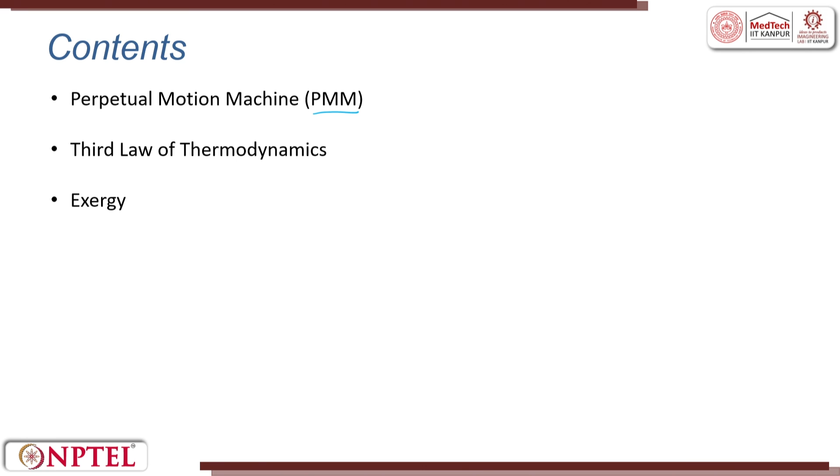What is a PMM? A PMM refers to an imaginary machine, which does not exist, that can operate endlessly without any energy input while continuously producing a useful output. So, you do not give any input, but the machine starts moving on its own. Those machines are called perpetual machines. Such machines have fascinated inventors for centuries, but they are fundamentally impossible because they violate the basic laws of thermodynamics.

So, now it is very clear that the basic law of thermodynamics exists. If the basic law of thermodynamics is defeated, then it is always a perpetual machine. The concept of PMM reinforces the importance of the first and the second law. Energy is converted from one form to the other. The second law says you will never convert all the energy into another form, and reminds us that no energy system can be perfectly efficient or run forever without fuel or energy input.

Think of a scooter you buy, a car you buy: you fill it once and then you forget it. It runs all through your lifetime, no petrol requirement, wonderful, right? But that does not exist. If that could exist, then the laws of thermodynamics fail. So, that is what I have written here: no energy system can be perfectly efficient or run forever without fuel or energy input. PMMs are classified based on thermodynamic laws: PMM 1 and PMM 2, according to the two laws they attempt to break.

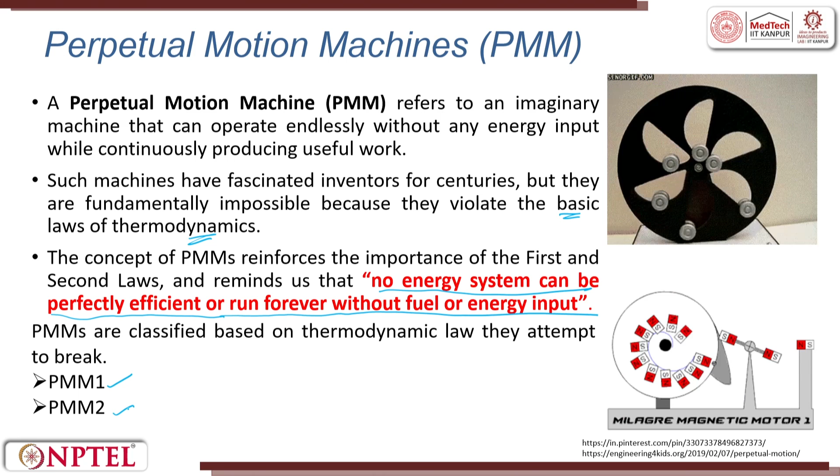What is PMM 1? PMM 1 violates the first law of thermodynamics, which is the law of conservation of energy. PMM assumes that it can produce more energy than it consumes, essentially creating energy from nothing. So, this is PMM 1, this is the surrounding and you have a shaft. Nothing is there, you do not give any input, and it starts rotating.

There can be a possibility: what if I make the surrounding very violent? For example, I pump in a lot of air, or I keep it on my terrace where there is wind velocity. And friends, if you keep moving from floor to floor, suppose you are staying on the 25th or 30th floor, the wind velocities are pretty high. So, if you take this machine there, maybe you attach a fan so that the fan keeps rotating. But there also, the wind velocity is created by something.

For example, a device that supposedly powers itself while running a generator without any fuel input would be a PMM1 condition. This directly contradicts the principle that energy cannot be created or destroyed in any physical process, because without anything you are able to get an output.

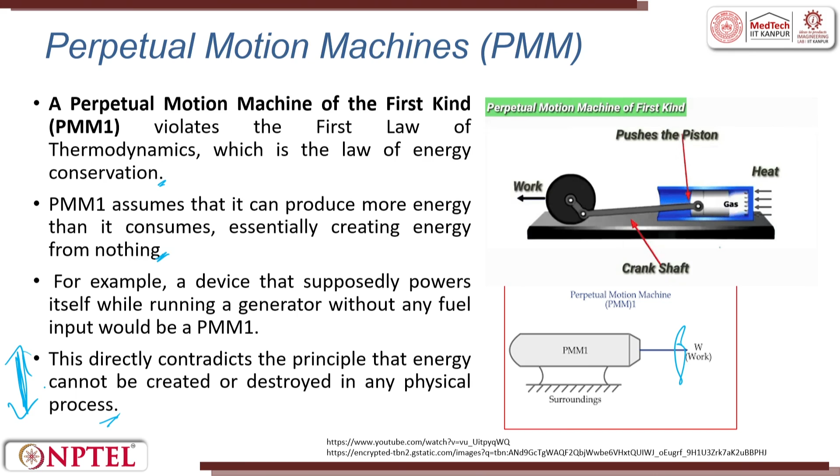PMM2 violates the second law of thermodynamics. It assumes that it can completely convert heat into work without any loss or heat rejection to a sink: 100% heat, 100% converted into work. It would be lovely if the turbine machine worked at 100% efficiency, nothing better than that. You would save a lot of energy.

If you take a thermal power plant, what we do is we put coal, we burn the coal, and this generates a lot of heat. This heat is transferred to water. This water gets converted into vapor, steam, and that steam with great pressure is pushed onto a blade. This blade starts rotating. The moment the blade starts rotating, there is a shaft attached, and this shaft is attached to a generator.

So, what if 100% of whatever you throw in gets converted? It would be lovely. You do not have to burn more coal. If you do not have to burn more coal, you do not have to excavate more coal. You see, nature is getting protected if we have PMM2.

It assumes that it can completely convert heat into work without any loss or heat rejection to a sink. Hence, it would mean operating at 100% thermal efficiency. It is impossible because every real heat engine must reject some portion of absorbed heat to a cooler reservoir, and some energy is always lost due to irreversibility and increase in entropy.

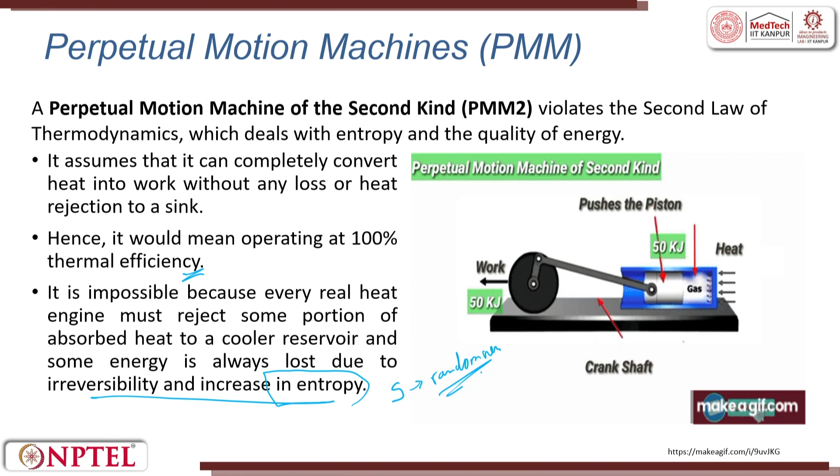We saw increase in entropy in the last lecture. We were talking about S. S is nothing but the randomness or the disorder that is created. Despite countless attempts, no perpetual motion machine has ever worked or been validated by scientific testing. Though you see a lot of small WhatsApp videos, or people have demonstrated PMM in a very incubated condition, it has never been demonstrated very successfully.

These machines serve primarily as thought experiments to reinforce the strict boundaries set by the laws of thermodynamics. So, what are we trying to say? Thermodynamics laws cannot be violated. There is no machine developed violating the two laws. Their failure highlights an essential truth: all real systems require energy input to function and are subject to inefficiency. So, is that clear?

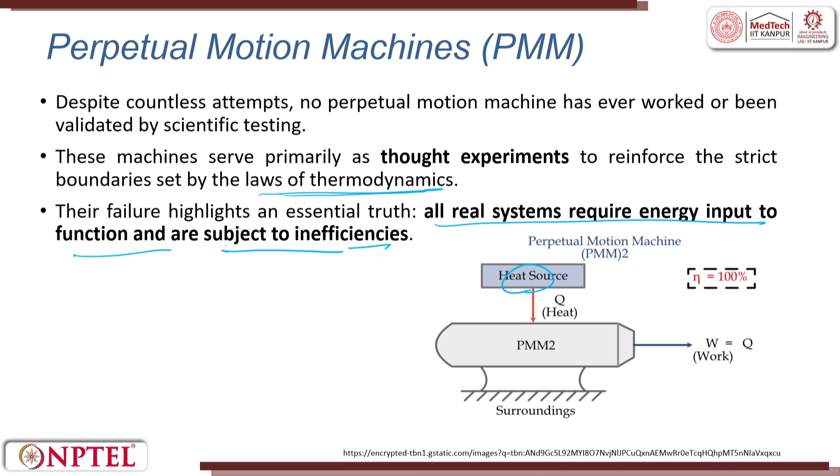So, why are we talking more and more? This is because you should understand there is a lot of waste energy generated in any machine, and you will never be able to get 100%. The moment you do not get 100%, to operate the machine, you will pump in more energy. To pump in more energy, you will have to generate that energy. You see, it is a cycle. So, all real systems require energy input to function and are subjected to inefficiency. There is always a loss. So, a heat source, then you have PMM2, then you have a surrounding.

What is the third law of thermodynamics? We saw the zeroth law, first law, second law. Now, we will see the third law of thermodynamics. The third law of thermodynamics deals with the behavior of systems as they approach absolute zero temperature. What happens at absolute zero? And it provides a reference point for the measurement of entropy. Only for this, the third law comes into existence.

The law states that as the temperature of a perfect crystalline substance approaches absolute zero, its entropy approaches zero as well. Generating a perfect crystalline substance is difficult. We have covered in our materials portion what is crystalline and what is amorphous material. There are crystalline, semi-crystalline and amorphous materials. So, as perfectly crystalline substances approach 0, their entropy approaches 0 as well.

So, as the temperature decreases, there is a decrease in kinetic energy. More decrease in temperature, more decrease in kinetic energy. Kinetic energy is what? Potential energy leading to kinetic energy. Kinetic energy is basically half mv square. So, you are reducing it. More and more energy settles down and then you get 0 kinetic energy, which happens at 0 Kelvin.

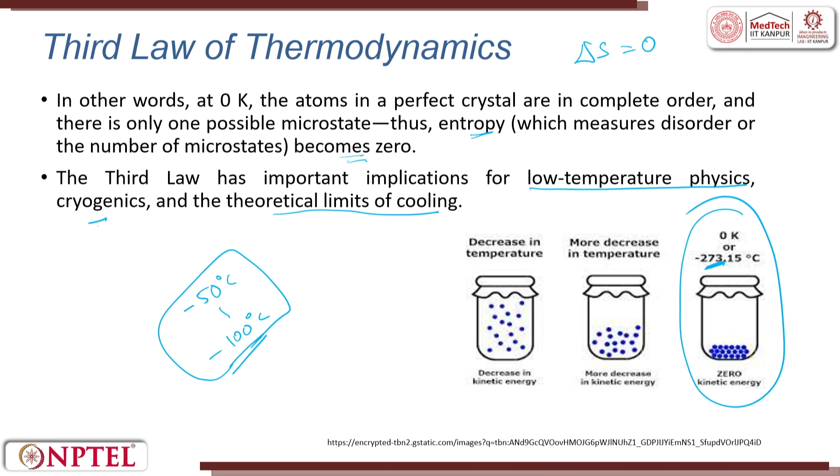From a practical perspective, the third law allows scientists and engineers to define what is the absolute entropy of a substance, not just the entropy change. I told you earlier in the lecture that delta S is very easy to do, but defining S is very difficult, because delta S is like from 1 kilometer to 2 kilometer, the difference is 1 kilometer. But you have to say this 1 kilometer with reference to 0, and that 0 establishment in entropy is a challenge. So, that is what happens here.

From a practical perspective, the third law allows scientists and engineers to define absolute entropies of substances, not just entropy change. This is useful in chemical thermodynamics, where standard entropy values are used to predict reactions, spontaneity, equilibrium and Gibbs free energy. These are very important. When we talk about Gibbs free energy, where does it come from? It comes from the standard entropy. Reaction spontaneity: at what stage or what time does a reaction happen?

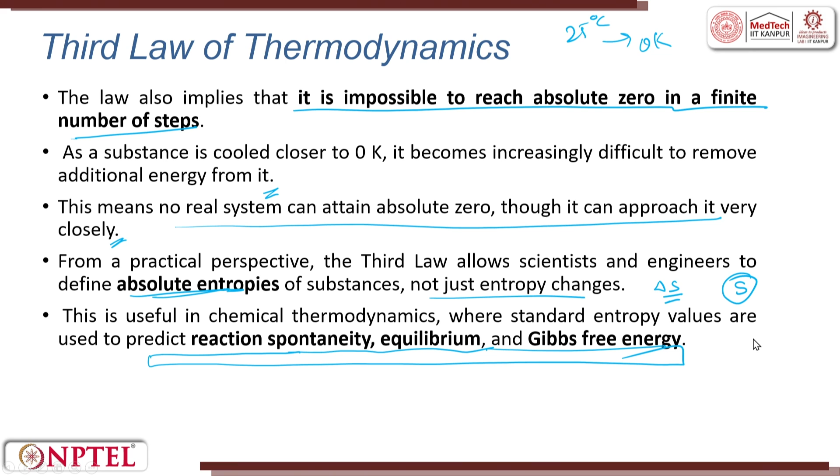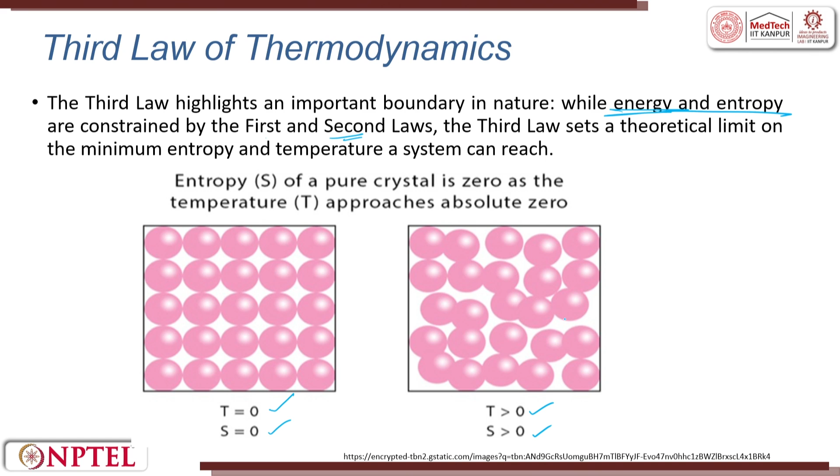The third law highlights an important boundary in nature. While energy and entropy are constrained by the first and second law, the third law sets a theoretical limit on the minimum entropy and temperature a system can reach. So, this is T equal to 0, S equal to 0. When T is greater than 0 and S is also greater than 0, you see this distortion happening to the atoms there. The third law also explains why materials exhibit strange and unique properties at cryogenic temperature.

So, at one point of time in the early 1980s or 70s, people were talking about superconducting materials, right? And people were also talking about superfluidity. At that time, people were trying to do experiments to see what happens to the conduction behavior at low temperatures. Even now, a lot of people work on it. But the kickstart of superconductivity was in 1970-80, it was the peak. So, when they see at room temperature, suppose the conductivity is 10, forget units, 10x, whatever it is. Now, when they go to sub-zero, they see it can go up to 1000, just for discussion's sake, 1000x.

So, now what they are trying to do is see whether they can create this ambient, keep the component there and see the conductivity happening very fast. If conductivity is happening very fast, the resistance is low, so there is not much heat dissipation, and you can use that advantage. And superfluidity is also another major area which came into existence. So, that is why people are more interested to work with this third law. Though less commonly used in everyday thermodynamic calculations, the third law is essential to understand the thermodynamic behavior of matter at low temperatures and the fundamental limits of cooling technologies.

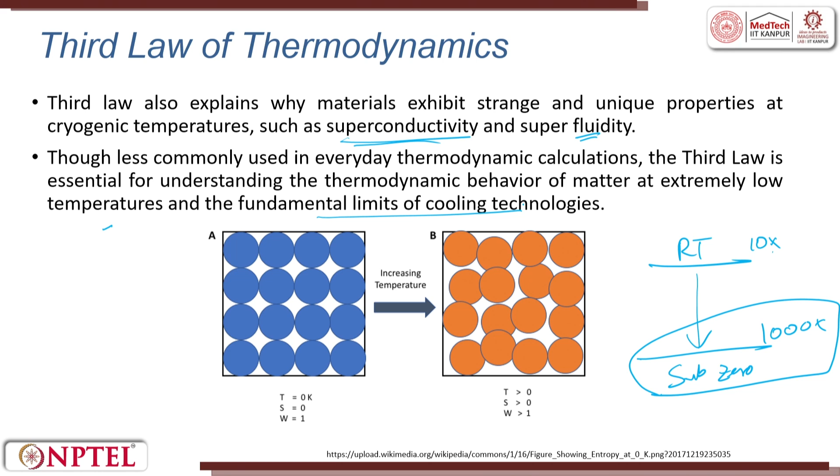The third law finds critical application in various scientific and engineering fields at extremely low temperatures, as we have seen, and the practical implication for the design of refrigeration systems, liquefaction of gases, and storage of biological material with minimum entropy is crucial. Liquefaction is: you have a solid, you have a liquid, you have a gas.

Suppose you have a lot of natural gas available, maybe on the coast of Kerala. Now, there is a deficit of gas in the northeast, just for discussion's sake. So the gas has to be transferred from here to there. One way is you pressurize it and send it through a pipeline. The other way is they make individual containers, and this gas is taken to a very high pressure and liquefied. That is what is called liquefaction of gases.

Once it is liquefied, they transport it to wherever it is required, and at that point the pressure is released again, so you get back a gas. The storage of biological material is also very important. That is why, once you finish your dinner, you put everything into the refrigerator, because you want to maintain the food without any bacterial growth. So you put it into a refrigerator at 12 degrees, 14 degrees.

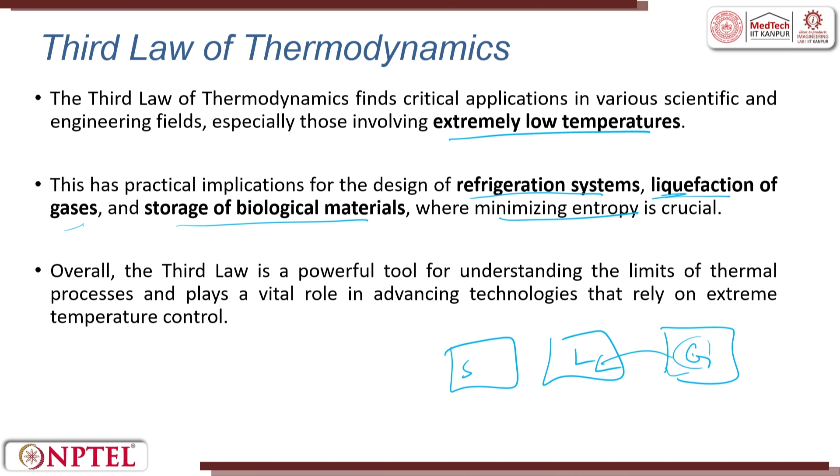In the same way, you can also store biological material. You have a tissue that has to be moved; storage of tissue is where minimizing entropy is crucial. Overall, the third law is a powerful tool for understanding the limits of thermal processes and plays a vital role in advanced technologies that rely on extremely controlled temperatures. Now, let us try to understand exergy. X plus energy; it is called exergy.

Exergy represents the maximum useful work that can be extracted from a system as it comes into equilibrium with its surroundings. Energy is always conserved as per the first law of thermodynamics, but exergy is not conserved; it is destroyed in real processes due to irreversibilities such as friction, unrestrained expansion, mixing, heat transfer across a finite temperature difference and other inefficiencies. So exergy is not conserved, it is destroyed.

For example, you have a boiler, a complete system, and heat is given. Like I was telling you about the thermal power plant with coal, you can also have gas power plants. So heat is applied to the boiler. In the boiler there is always water, and this water is heated to a very high temperature. The water gets converted into steam, the steam moves and operates a turbine.

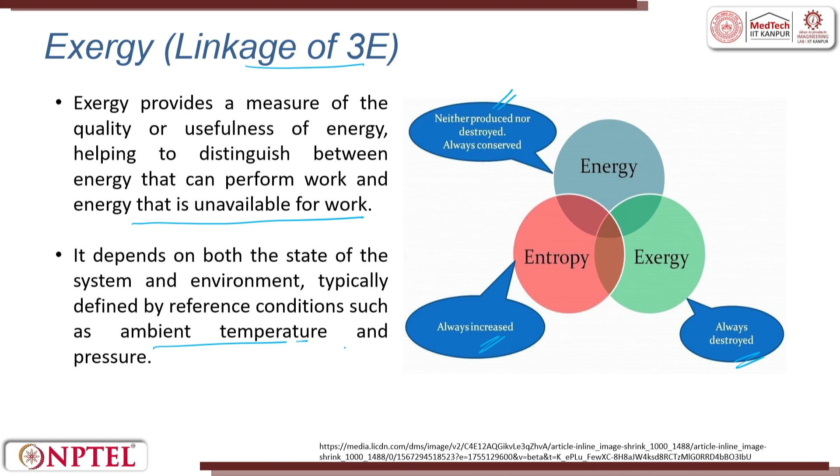Exergy. Type of exergy depends on the form of energy involved: thermal exergy, chemical exergy, kinetic or potential exergy. So, thermal energy is from heat, mechanical energy is from pressure, chemical energy is from chemical potential, kinetic or potential exergy is motion or elevation.

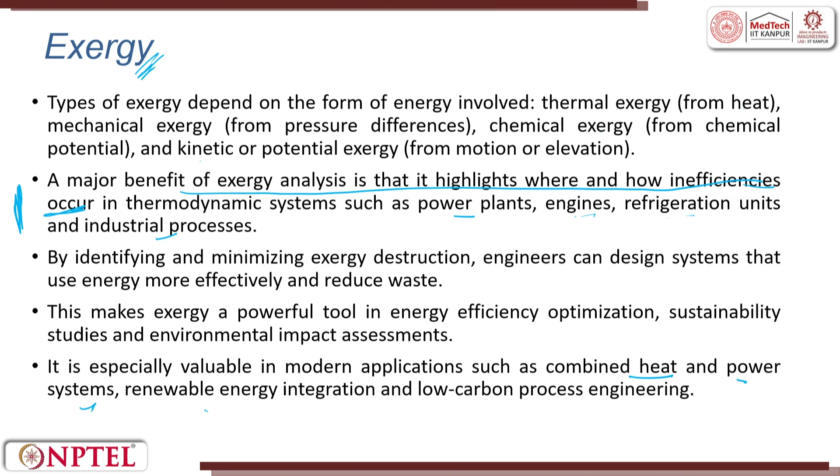By identifying and minimizing the exergy destruction, engineers can design useful systems. This makes exergy a powerful tool in energy efficiency optimization. It is especially valuable in modern applications such as combined heat and power systems, renewable energy integration and low carbon process engineering. So, energy tells us how much is there, while exergy tells us how useful that energy is. Please understand there is a big difference. How much is there, what amount of energy you have, what kilowatts you have. But exergy tells you how useful that energy is.

Unlike energy analysis, which shows energy is conserved even in poor design, exergy analysis reveals losses, pointing out the opportunity of improving performance and sustainability. So, if you are looking into sustainability, try to measure the exergy. While energy is always conserved, exergy is always destroyed in real processes due to irreversibility. Right? Friction, unrestrained expansion, mixing, heat transfer, etc.

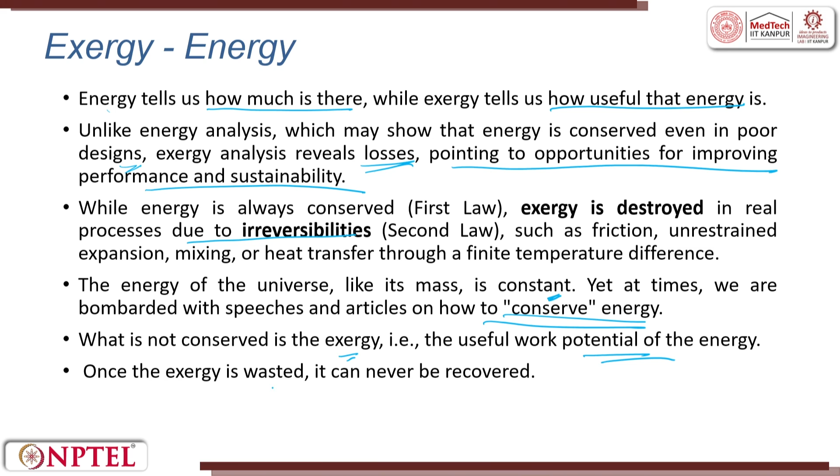The energy of the universe, like its mass, is constant. Yet, at times we are bombarded with speeches and articles on how to conserve energy. What is not conserved is exergy, that is, the useful work potential of the energy. Once exergy is wasted, it can never be recovered.

The second law efficiency. A common measure of energy use efficiency is the first law efficiency, ηI. The first law efficiency is defined as the ratio of output energy of a device to the input energy of the device. The first law is concerned only with the quantity of energy and discards the form in which the energy exists. It also does not discriminate between the energies available at different temperatures.

It is the second law of thermodynamics which provides a means of assigning a quality index to energy. The concept of available energy or exergy provides a useful measure of energy quality. I am sure with this and this you will be now able to understand and appreciate what it is. With this concept, it is possible to analyze means of minimizing the consumption of available energy to perform a given process, thereby ensuring the most efficient possible conservation of energy for the required task.

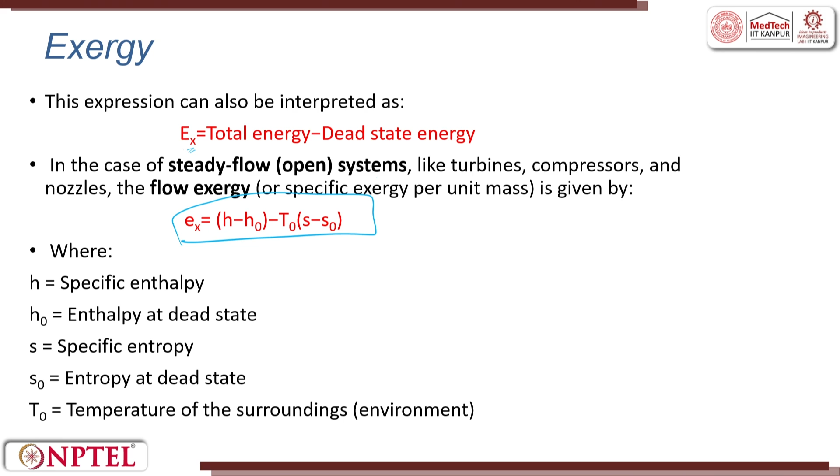This is for a closed system, non-flow process, right. In the case of a steady flow open system, this is for a flow process. X is equal to H minus H naught minus T naught times S minus S naught. H naught is the enthalpy at the dead state and S naught is the entropy at the dead state, right. So, there are different types of exergy, as I told you: physical, chemical, kinetic, potential.

Physical is due to the difference in temperature and pressure with the surrounding. Chemical is due to the chemical composition. It is usually obtained from the standard table of a common substance. Kinetic energy is equal to V square by 2. Potential energy is gz. So, the total is nothing but X physical plus kinetic plus potential. So, this is the total specific exergy.

So, exergy destruction and efficiency: exergy destruction quantifies irreversibility in a process. Ex destroyed is equal to T naught into delta S gen, where delta S is the entropy generated. Exergy efficiency compares actual performance to the ideal performance: useful exergy output divided by exergy input. The efficiency is always less than 1 even if the first law efficiency is high.

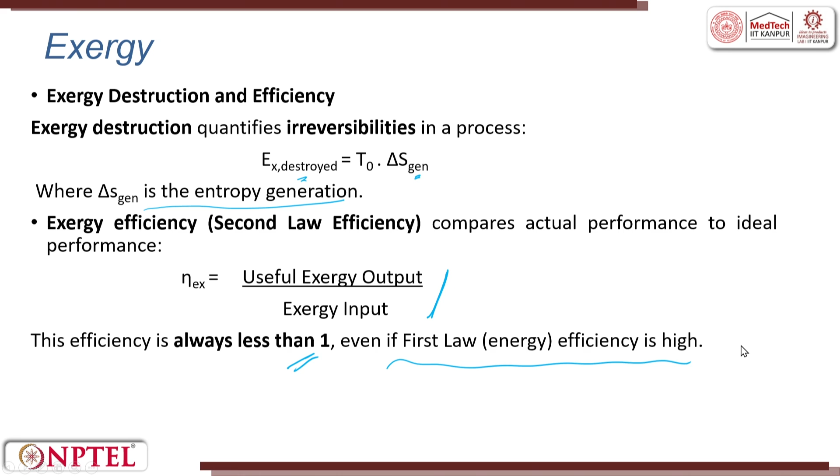So, the maximum useful work potential of a system at a specific state is called exergy, which is a composite property depending on the state of the system and the surrounding. It is always talking about system, surrounding, boundary. The system which is in equilibrium with its surrounding is said to be at a dead state having 0 exergy.

While energy is conserved by the first law, exergy is not. It can be destroyed by irreversibility, making it a crucial tool for efficiency and sustainability analysis in real systems. Exergy is completely destroyed when the process is fully irreversible. In irreversible processes, friction, unrestrained expansion, mixing of different substances, and heat transfer through finite temperature difference generate entropy, which directly causes exergy destruction.

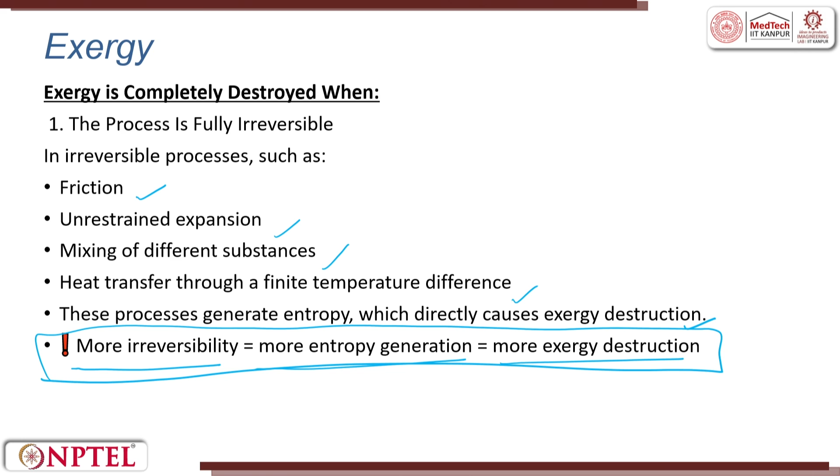More irreversibility, more entropy generation, more exergy destruction. This is a take home message for you. The system reaches mechanical or thermal equilibrium with the environment when there is no temperature difference, so no heat engine is possible; no pressure difference, so no expansion work is possible; no chemical potential difference, so no reaction driven work happens. So, at equilibrium, the system has no potential to do useful work. Exergy is 0. It is said to be completely destroyed.

So, to recap, in this lecture, we saw what is a perpetual motion machine, how a PMM interacts with the first and second law of thermodynamics, and what the third law of thermodynamics implies. Should we recollect what it says? The law states that as the temperature of a perfectly crystalline substance approaches absolute 0, the entropy also approaches 0. So, we find the 0 of entropy, so that we can always have a relative measurement, a delta S measurement.